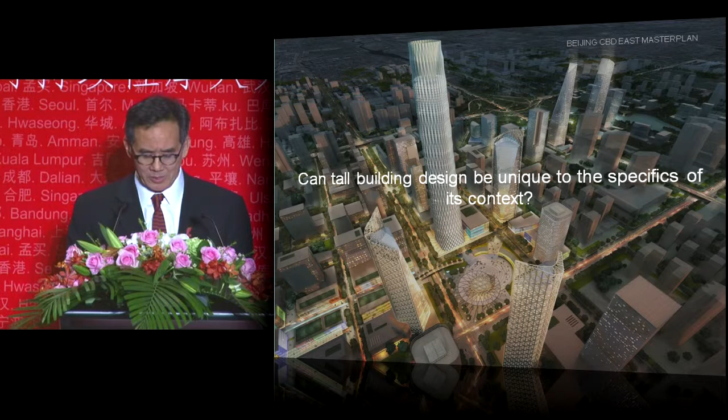The projects I'm going to show are a little bit personal - projects I've been involved with - but I'd be remiss not to acknowledge the hundreds of people at SOM, architects, engineers and designers, who have been part of this collaborative process, as well as the many consultants I see out in the room. In fact, we could do a lot of damage if we all got together and tried to think about the tall building, as well as the very good clients and enlightened city officials.

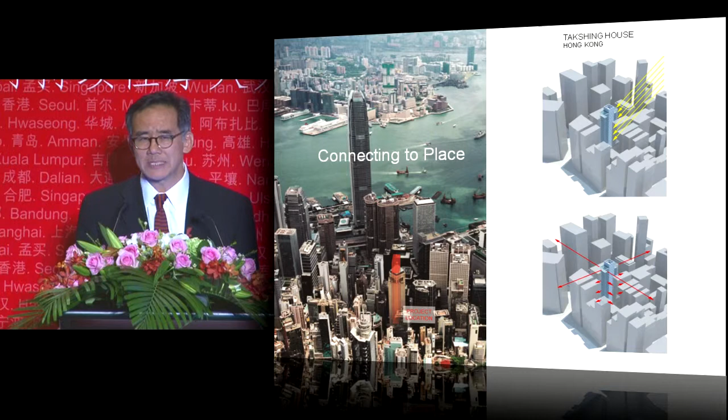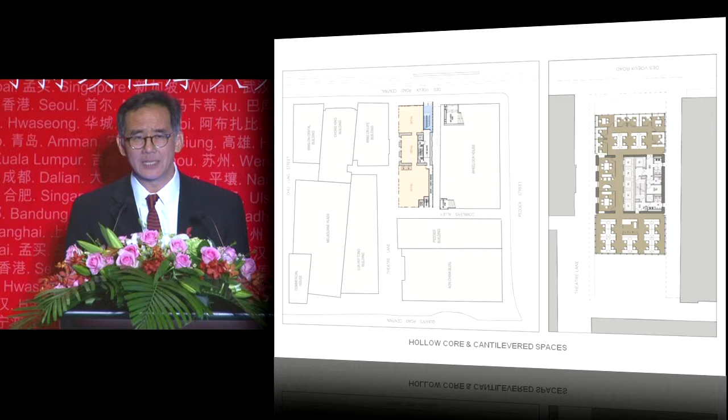We believe that in thinking about buildings and places, the context of the tower is obviously very important, and sometimes it's a site. For a project we did in Hong Kong, it was a very small site, part of that wonderful density of the city. How do you find a way to develop light, view, and air on a very small site at an intersection of many pedestrian paths - many of you might know this location from the site plan. How do you develop something that might be a different paradigm for structure, raising the program up on a great tree trunk concrete core, with cantilever floors for office spaces designed for light and air, trying to maximize the views.

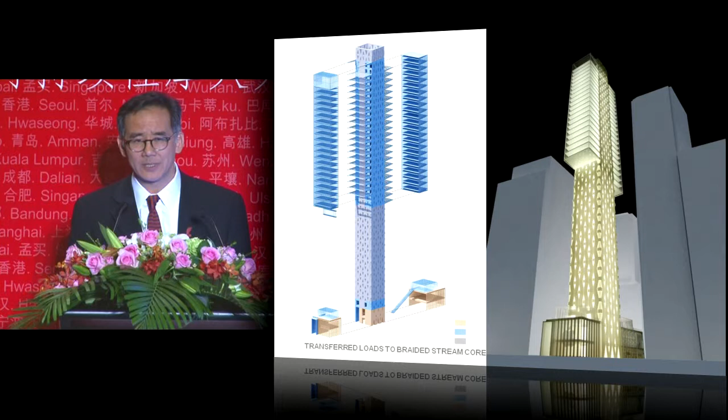There was actually another benefit: at the site, at this intersection of many pedestrian paths, it opened up the existing historical facades and allowed an environment of retail, of scale, of people moving through the block of the city. This was just one idea of how that specific place in this very dense center of Hong Kong allowed us to think about a tower in a different way that might yield some innovative ideas.

Sometimes it's a city. For a project in Beijing, a headquarters project, it was across the street from the existing headquarters, so there was a direct symbiotic relationship between those two buildings.

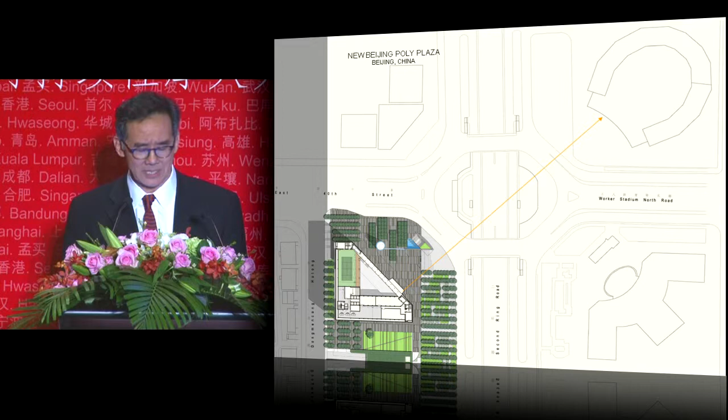This company wanted to think about how they could communicate their mission and goals to the public, dealing with being open and transparent about highlighting certain aspects of the company, which in this case was a museum, art companies and communication companies. We gathered those elements in a special element framed by a great window that looks out to the city.

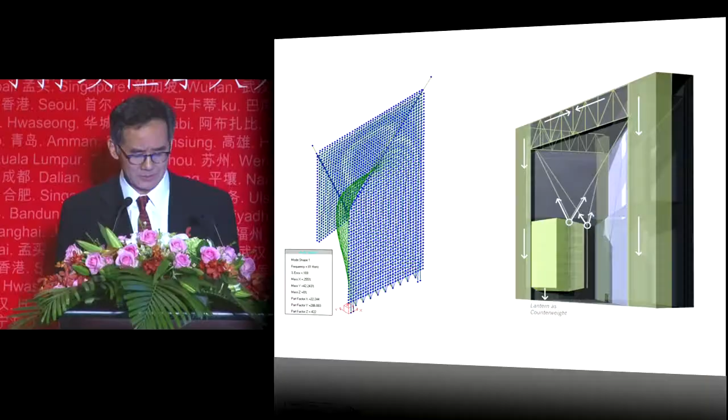In doing these things, we often rely on teamwork with very talented engineers and architects to intensify the experience of these elements, because it is in the making of architecture that you derive the special quality that makes places memorable. Our engineers devised these special elements that we exposed, allowing us to think about the rest of the building as part of a stronger identity for this company, about its power, gravitas, and stability, and related this building to the city, which is Beijing.

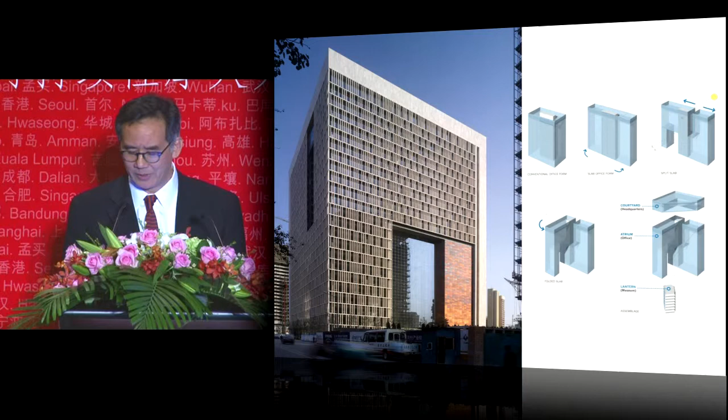We think of Beijing as a city of walls and solids, and dealt with a quality that made the building very much open and transparent on one hand, but also environmentally responsible on the other. We thought about materiality so it had a quality that linked it to the place and to the things inside.

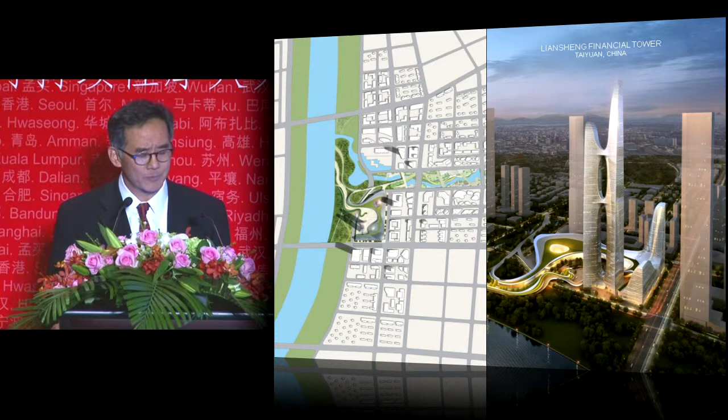Sometimes it's the context of the landscape. For a project we're working on right now, it is at the junction, the banks of a river, bordered by mountains and a landscape that is quite beautiful. We developed this fluid series of forms that dealt not only with the towers, but also the podium, landscape, and surrounding buildings to make this context.

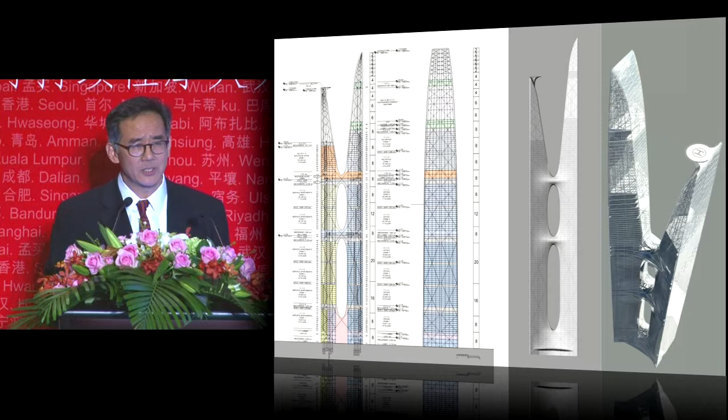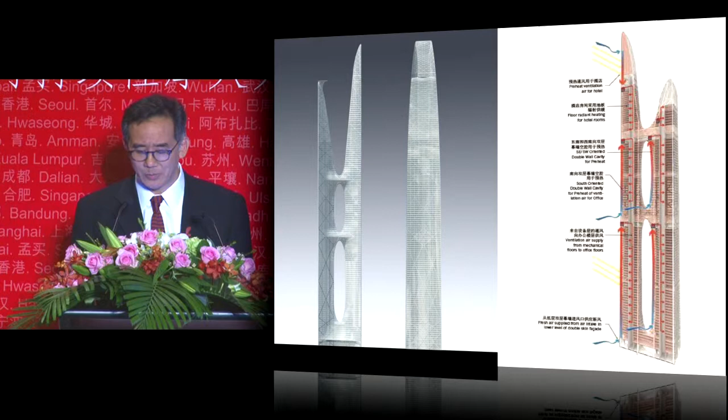One interesting thing about this tower was that it's actually two very slender, 2,000 square meter towers that rely on each other for structural strength, braced together by Bill's very expert group. They also rely on each other for vertical movement, so we developed movement systems for programs that would be in one tower or the other, since we had the space and could better use those lease spans. It also shared common building systems to make the building environmentally responsible.

We also think that in addition to context, program and expression of program, and invention of new ways to think about the program ultimately lead to an experience of a high order of exploration.

We try not to be willful in how we manipulate buildings. We definitely do not like to find some populist analogy and say it looks like this or that. Instead we try to think about real solutions, which in this case were four buildings on a very tight site.

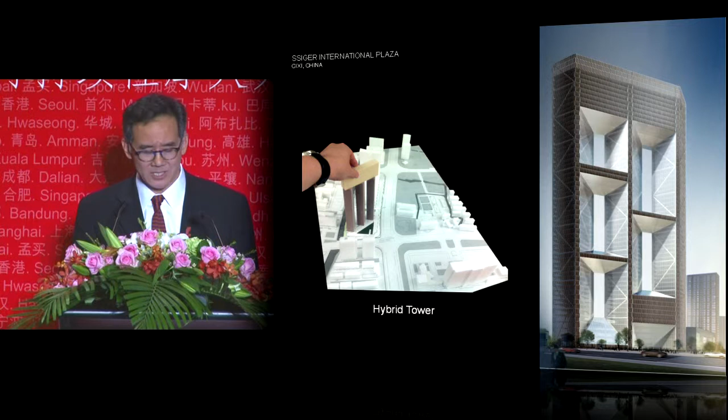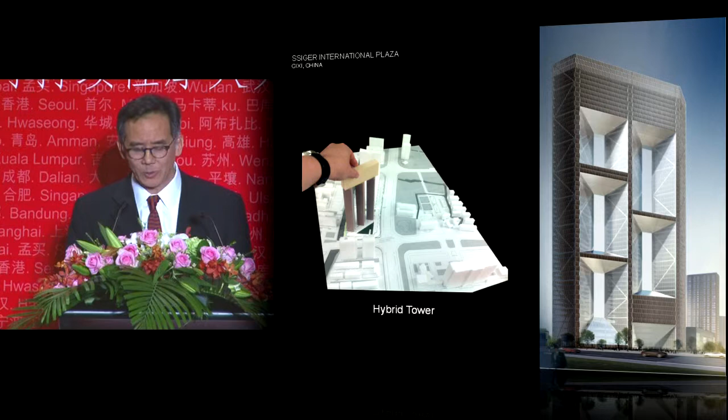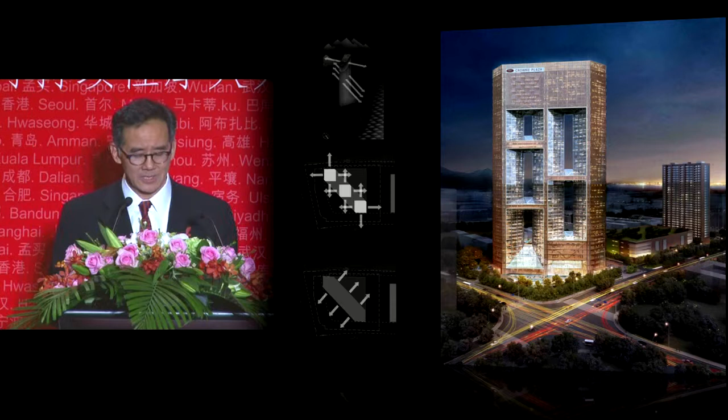We developed this hybrid tower of very slender forms for three residential towers that had light and air to these very slender legs, capped off by a hotel that linked the tops of the buildings together. It also allowed other bridges that supported those legs, providing a way to develop this network of movement and circulation within the three towers, capped by the fourth tower form.

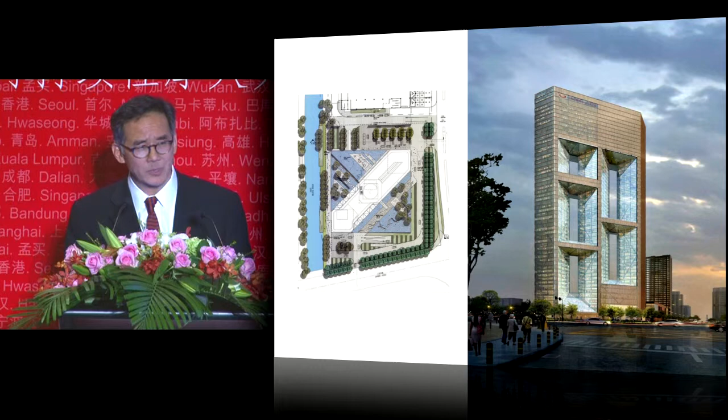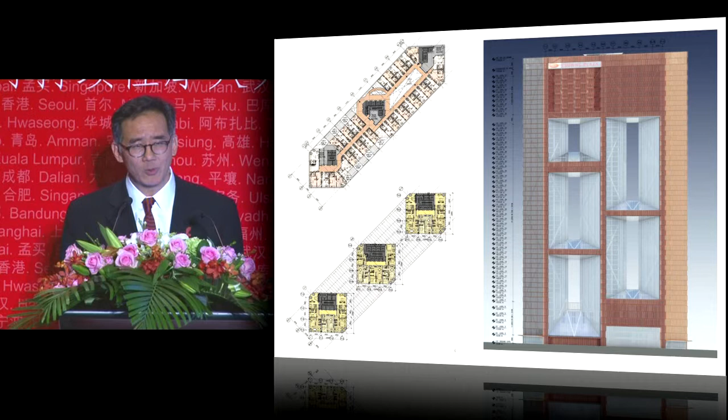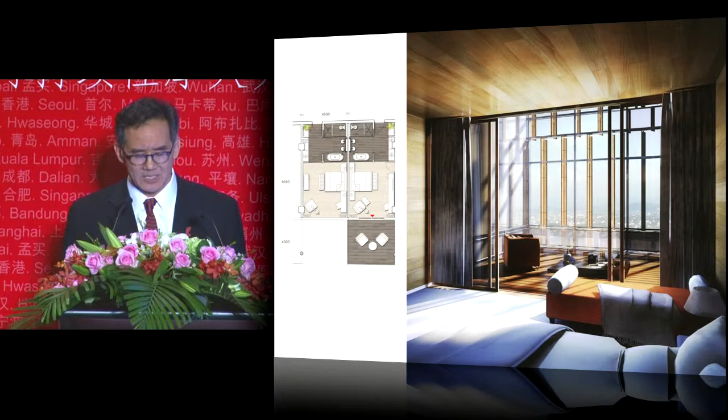It opened up many possibilities for the site to generate the appropriate setting for the building, which is next to City Hall, allowing us to think about each program in its most primary and experiential form, so it's the best and most efficient housing and hotel we could devise. It's then wrapped in a cladding system that provides rooms for either the hotel or residential that are responsive to the sun and climate of the city.

Now, admittedly, many of the buildings we do are towers, and I'm not going to talk about the condition of towers meeting the ground. I'm sure there will be other people talking about that, and especially the urban condition.

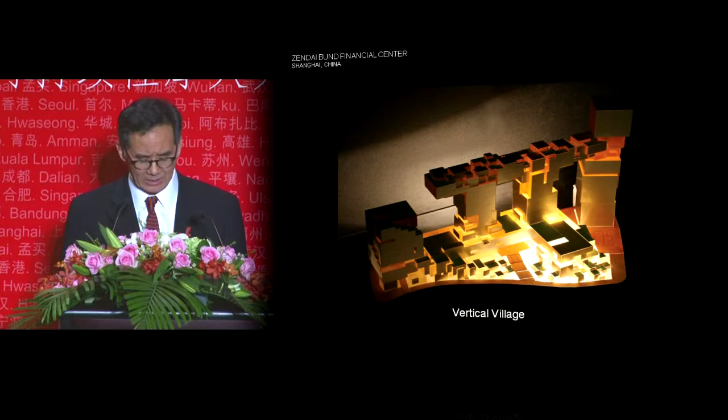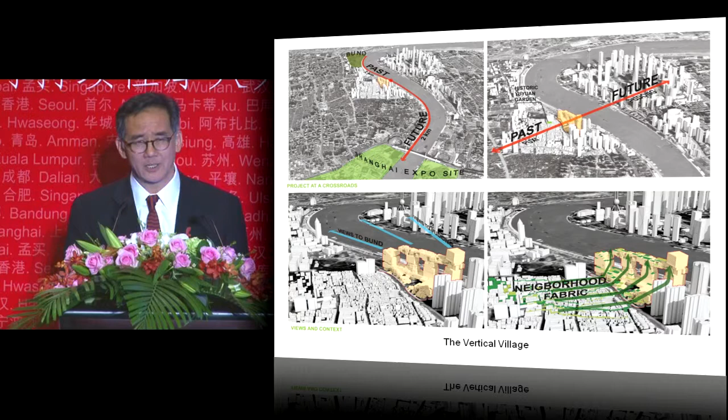But we do think that sometimes that urban condition can be a part of the experience in the tower itself. So what we called this project, which was a competition for a mixed-use project on the banks of the Huangpu River, a vertical village that tried to think about the elements of its context, particularly the Yuyuan Garden context and the historic city, wrapping it into the tower itself and into the forms of the building.

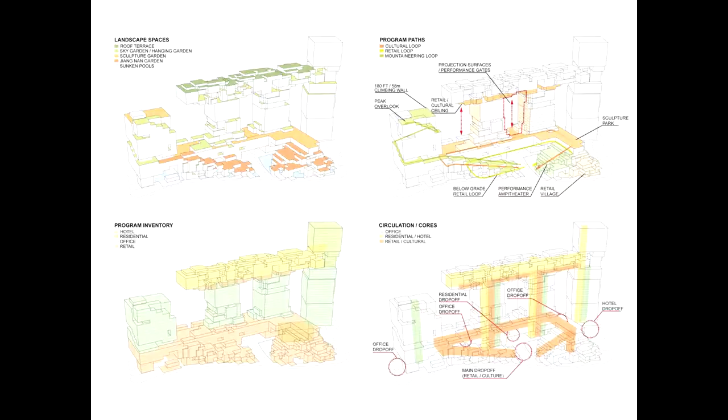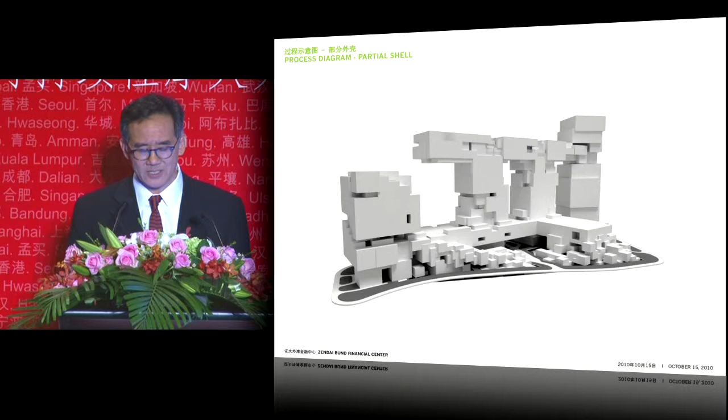So instead of just isolated singular objects, it became a building that was complex in terms of programs that interrelated to each other. It was complex in terms of the ability to get landscape on the buildings and up high, where you could actually enjoy it and participate in that experience. And then tied together with circulation that made a three-dimensional network, a three-dimensional series of paths that allowed you to think about how that building could define itself and create a series of spaces that intensified that quality of the tall building.

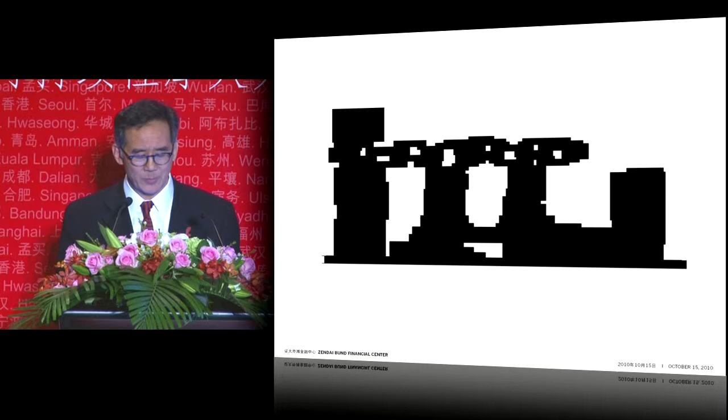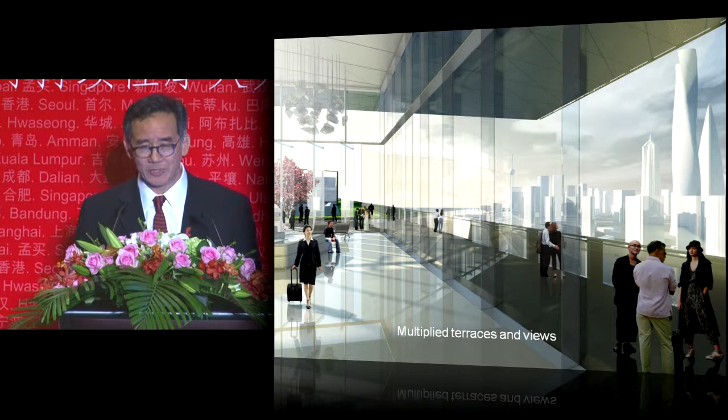So we obviously think of ways that space and those elements are made can develop a sense of scale to the river, and yet also a sense of scale to the surrounding context. And while you're able to get outdoors and appreciate the sense of the city, there's also ways to develop new perspectives of your experience in the tall building. So this project was really an experiment in trying to take that vertical village up.

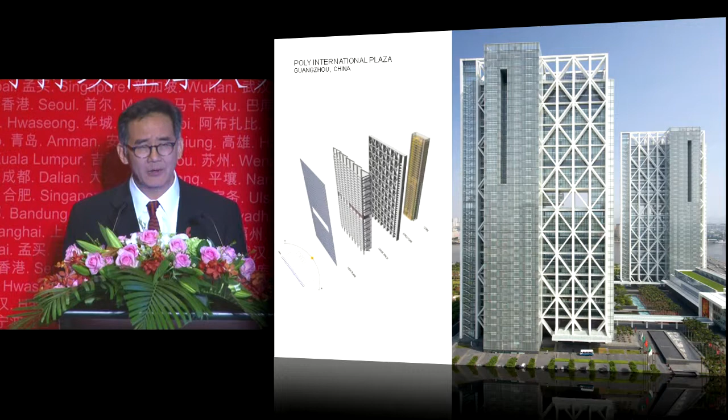Now, we are architects and engineers that very much believe in a rational and optimized structure, and that it boils down to how do you create efficient places of work, live, recreation.

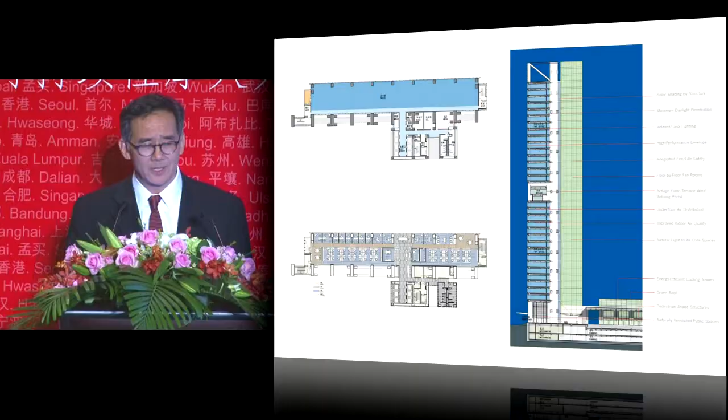For this project on the banks of the Pearl River, it was very much oriented to view on the north, and developed an offset core, which is a very understood typology, but we took it to the next generation in terms of letting the structure be very robust so that it was a structural spine that provided shading on the south, developed an opening through the building that relieved wind pressures, and yet also was a place of refuge, both during emergencies as well as during the typical workday.

It had a space that was very beautiful with light on two sides of the room. And then had a structure that was very stiff and strong, but allowed the core elements, which are normally on the inside of the building, to be turned inside out. Those core elements are then part of a new way of moving up and down, so that those elevators and lobbies might be full of light and view. Even the bathrooms have light and view.

And as the buildings come down to the ground, we do think that quality of considering that place, that environment of, in this case Guangzhou, where it's very lush and tropical, developing a sense of gardens that then relate to the paths to and from the buildings and to the other ancillary spaces, and to the quality of how you move into the building, so that there's a transition from the intense light and heat to secondary spaces that are maybe a little less hot and less light, and then finally into the use spaces within the building, so that there is an experience from the curb to your office space itself.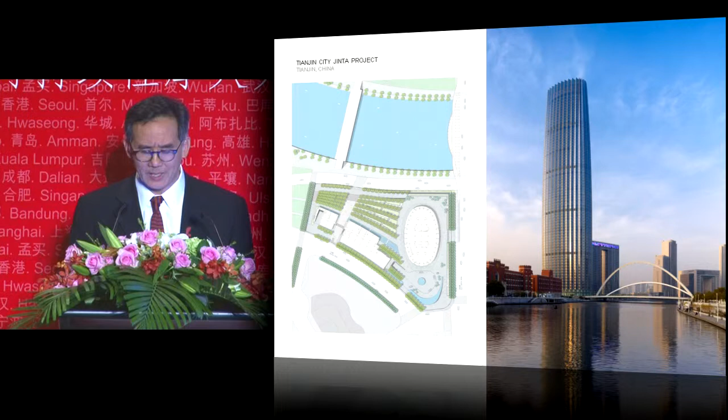We think that buildings, particularly tall buildings, need to rely on a structural idea and yield a building form that is recognizable and has a certain elegance, in this case, as a marker to the center of the city. We developed this plan that was part of a larger master plan and complex.

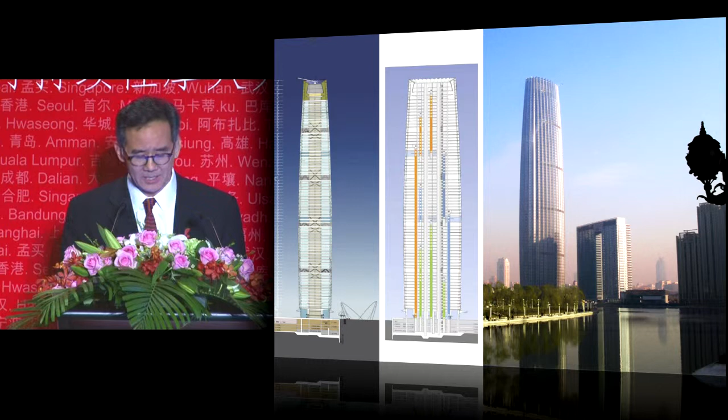It has a series of sky lobbies and double-deck elevators for a greater amount of efficiency. But what I find really interesting about this building is that in this classic order of the column, with a column-like form, that develops this emphasis of the gently bulging out shape that then tapers to the top.

We devised an idea of the wall that was a pleated or faceted wall that had common window units that extend up, but you see that the pleats change in terms of their angles. So it allowed us to negotiate this very beautiful but complex form in a very subtle and simple way. And the outgrowth of that meant that we had an efficient floor.

We had a great core that was a steel plate core developed by our engineers, one of the first steel plate cores in China. It had a moment frame, but there are 32 corner offices, because each one of those cantilever bays was in turn a very special place, made not just by the building, but by the engineering and by the configuration of that exterior enclosure.

This building is a marker for the center of Tianjin, and it plays on the climate and the light in a very special way. We think that quality of developing something partly abstract, but partly allowing the citizens of the city to adopt it and say, this is our marker and our center.

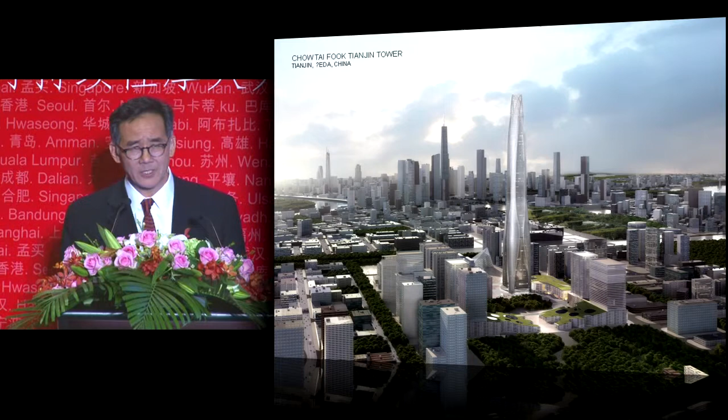The building is also very efficient in terms of its relationship to wind because of that gently tapering shape, the softness on the edges, as well as the serrations.

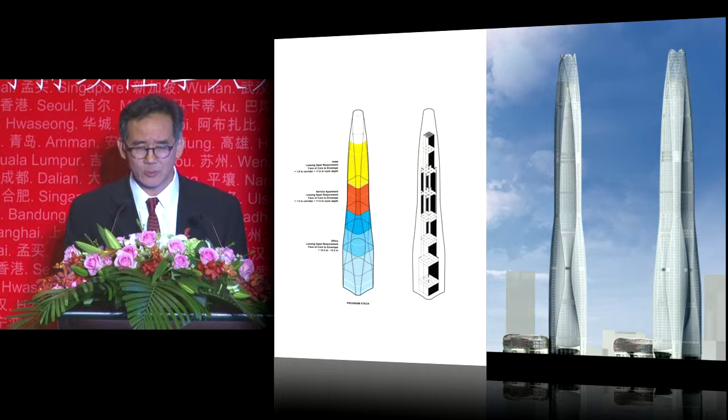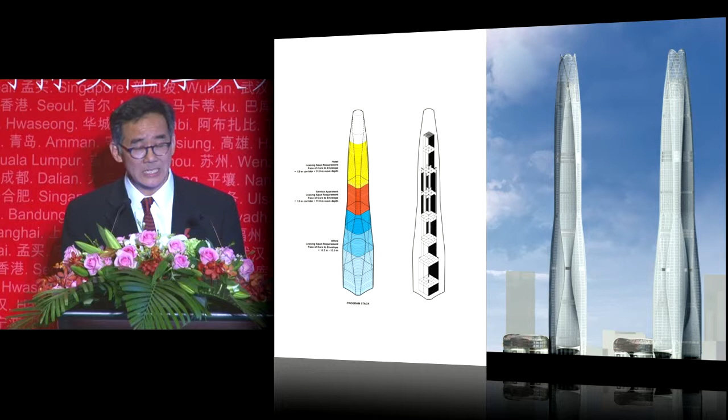Taking those same ideas, we worked with Bill's group and developed a very interesting building we're currently working on, with similar ideas about mixed use and the qualities of a building with 24/7 activity throughout the tower, but also recognizing that each of those spaces has very different requirements in terms of lease spans, floor heights, and access.

The office at the bottom is bigger because those lease spans need to be more efficient and have certain qualities. The residential in the middle was actually smaller in terms of lease spans, and the hotel at the top was larger and needed a little bit more.

That yielded this bottle shape, a very fluid form that also considered how those concave and convex surfaces worked with the plan. We devised a structural system that was an innovative idea, in addition to a moment frame with 9-meter column spacing at the base of this 530-meter tall tower, which we think is quite beneficial to those office spaces.

There's a diagonal mega column that links each of the four sides together, tracing those convex and concave surfaces. When we went into the wind tunnel, very early on, Bill Baker told me one of the biggest things you can do is generate an efficient form for the structure.

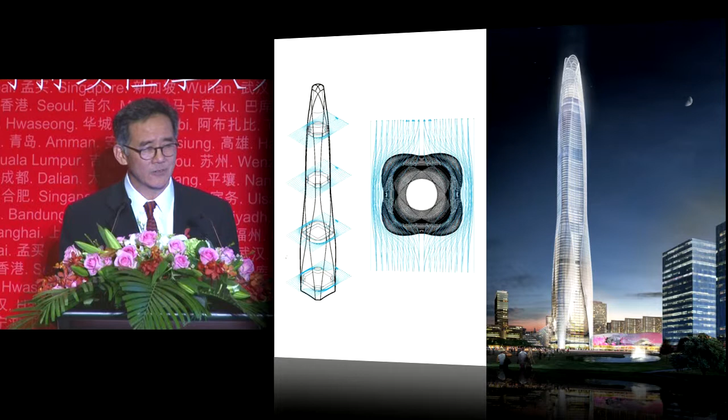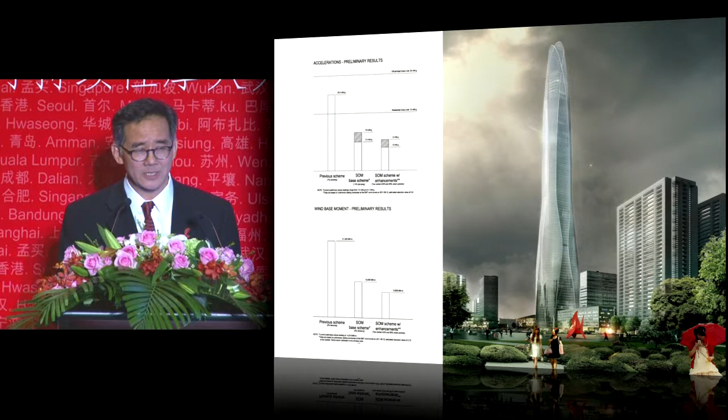This quality of designing by recognizing wind allowed us to develop a building that was efficient in terms of each use, has a very strong iconic quality, and has great efficiency in reducing accelerations and wind base moments, ultimately saving our clients tens of millions of dollars. That idea of developing something that works on all levels isn't just a willful idea about making a form.

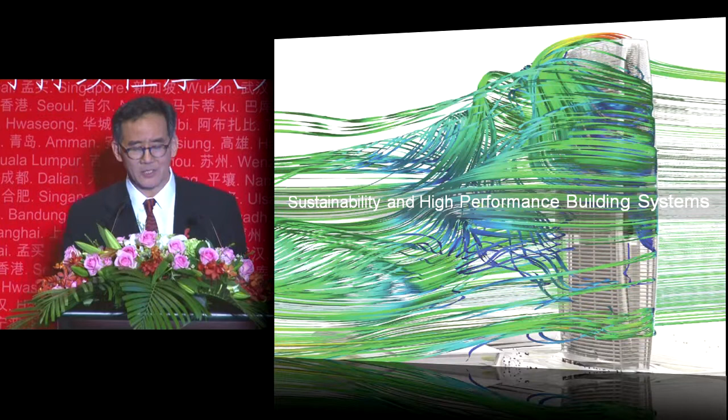It's not about textures, patterns, or numbers, but really looking at performance and sustainability, particularly climate, in a place like China where energy is going to be one of the key issues in terms of its development.

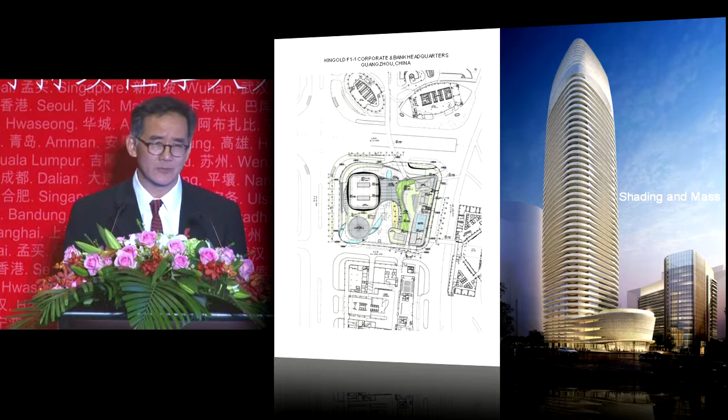We think that buildings don't always have to look the same. In fact, one of the things we did with this project in Guangzhou was to think about how every building today in China is blue-green glass with silver mullions, with a sameness to each one. So how do you develop something that deals with shading, has an efficient floor plate, and lots of corner offices?

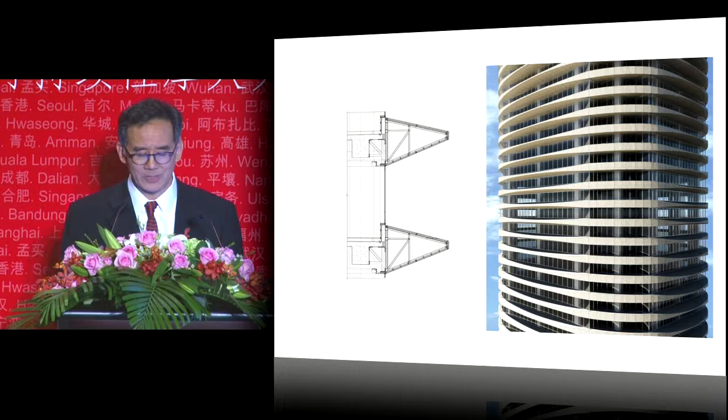It has terraces on the corner, allowing for the kinds of cultural business models people market today, but develops a very simple idea about the spandrel and how it can change as it moves around the building, whether at the broad faces or at the corners.

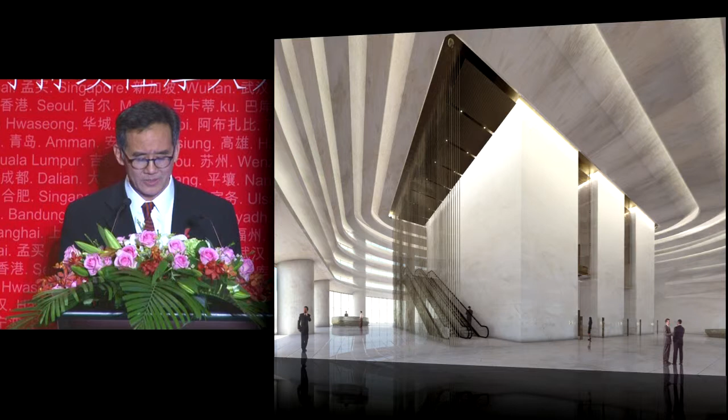This yields a quality that is very voluptuous and different, about more shade and shadow in a hot climate. We then took that language and repeated it in the base of the building and the other secondary buildings, in order to develop an identity specific to this place, this program, and this building owner.

Another building under completion right now is a tower that is also very simple in terms of its square floor plan. We recognize the issues of the market about light, air, and flexibility.

We devised a structural system that was based on a moment frame, but then it also had a very clever diagonalized system of braces that reduced the inter-story drift. That idea allowed us to save material and have accelerated construction.

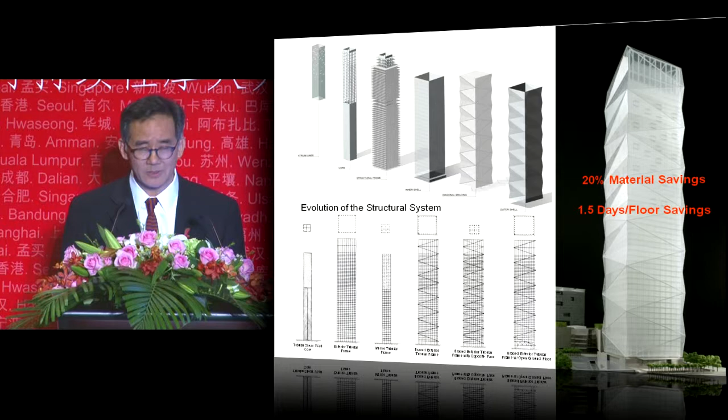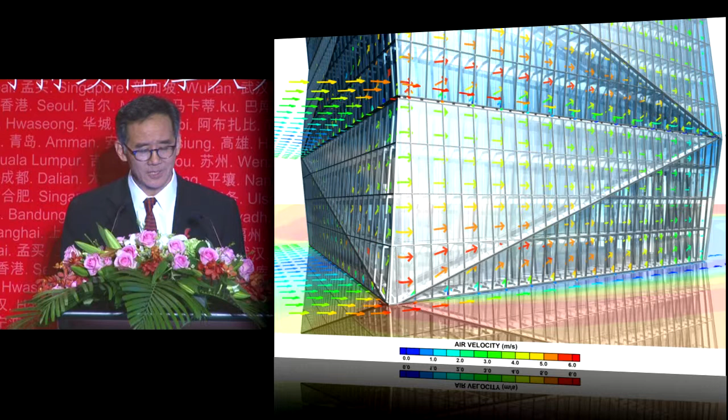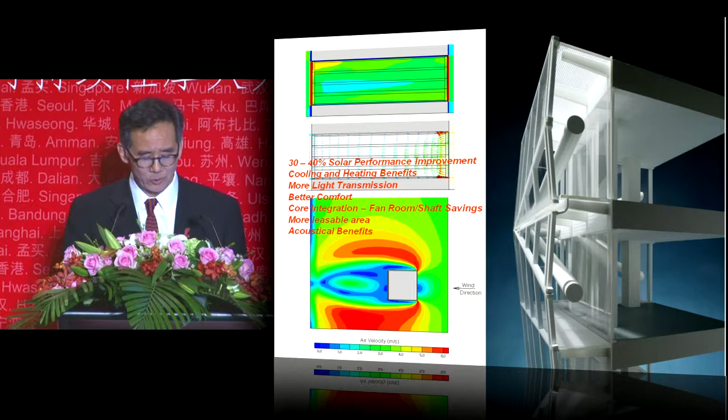We also know that tall towers have positive and negative pressure on them, and understanding how that pressure works on the facades allowed us to devise a system with a strapping structure that moves around the tower, developing a double wall that reduces the heat loads on the inner wall, reduces the ambient temperature, and allows for heating and cooling benefits, giving this building a quality specific to this hot stove city of Nanjing. The building is finishing up construction, and we hope we'll be able to test those results and assumptions.

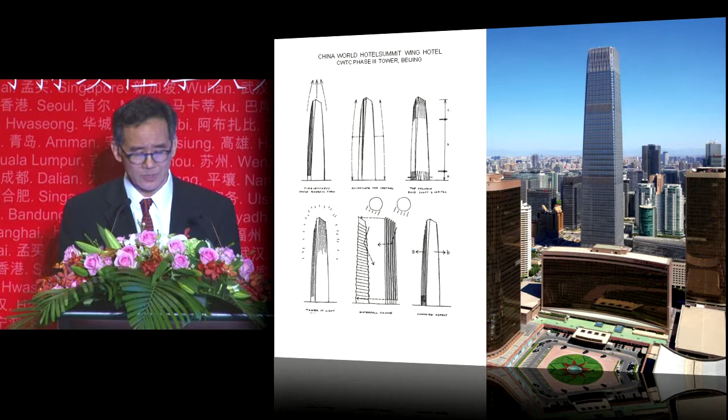For a project in Beijing, you might be familiar with this one, it's a very simple structure. We talked about its primary form being as quiet as possible, not an exuberant form, but really signifying and representing the dignity and elegance of this China World Trade Center as the center of the CBD.

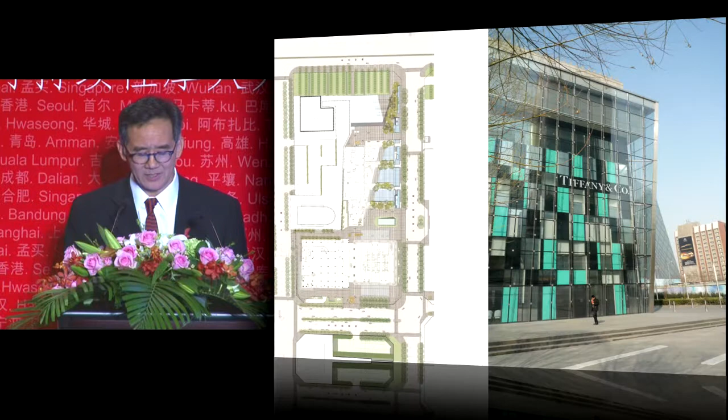Here it was really taking a square plan and a core that was actually developed with our local architects, then developing a well-crafted wall that dealt with the light in Beijing, the quality of the air, the ability for that wall to reflect light into the spaces, for indirect light into shade, and to have something that tied into the base in a way that was dignified and marked the center of the CBD.

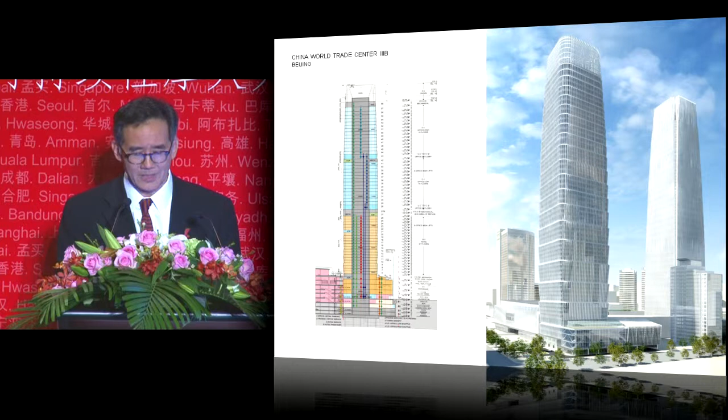We're currently working on the master plan to tie the buildings together, and a second phase that also looks at many of those same themes of efficiency, construction costs, and speed, but also thinks about how we could accelerate some of the ideas about the exterior wall so it performs even better than the previous one.

We discovered that if we tilted the facade out about 5 degrees, it yielded a significant reduction in the heat loads on that glass, both during the summer and the winter, and also reduced the glare in those spaces, and provided a surface that would be self-cleaning because most of it wouldn't be subjected to the qualities of the Beijing dust.

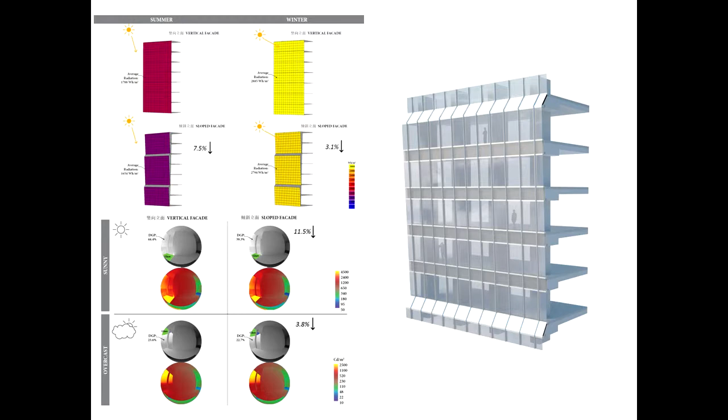This project is currently going through its approvals, and we think there's actually an interesting tie-in to the existing tower in terms of its singular form, but also represents a little bit about growth and a certain organic, natural quality.

I'm going to finish up here with a project we're currently doing that I think represents many of the same themes we believe are important to our practice, which is understanding the zoning elements—in this case a hotel and office building project. We had an idea where height really isn't an issue, and we were actually able to carve elements out of it on this tight site.

We were then able to develop a building that brought the context of light, heat, shading, and landscape into the building, developed an atrium in the center to organize the hotel so light might come down into those common spaces, and developed terraces for a majority of the rooms—a way of creating a memorable place, in this case a hotel guest room, where you had water, dappled light, and a quality where you could open the windows in shade and get a breeze.

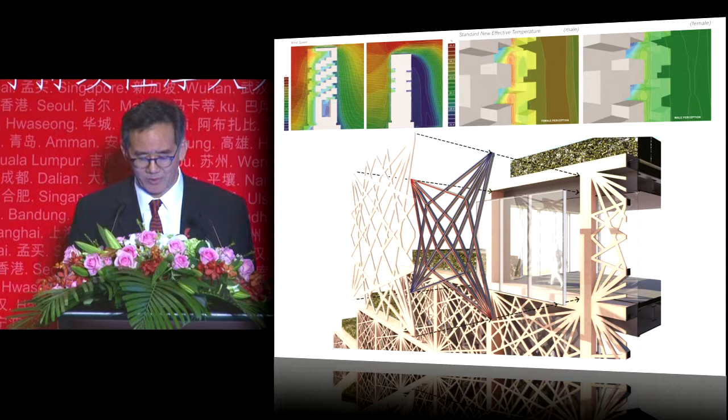We then developed a structure that built on some of our earlier explorations and research on the cantilevered floor with a strong core, yielding an experience for this hotel with an incredible amount of privacy, even though the terraces were connected. The structure was integrated with the cantilever, developing a quality of screening for those facades as part of the diagonal bracing, which provided shade and wind circulation into a unique space.

This quality is based on rational architecture and engineering, trying to develop innovative uses of materials and structure, and then bringing that experience into the building so you would remember it and create a sense of place.